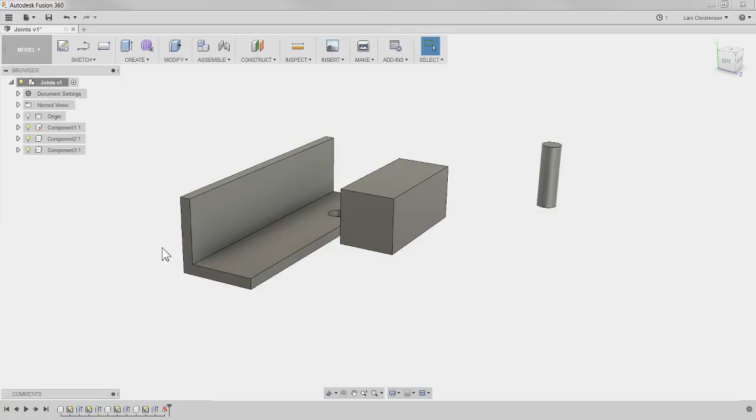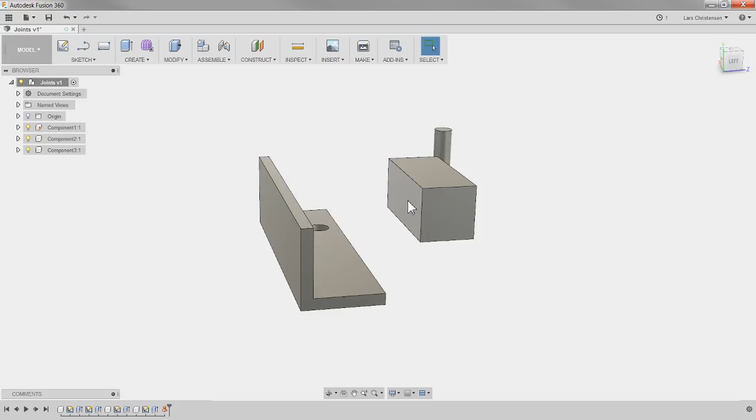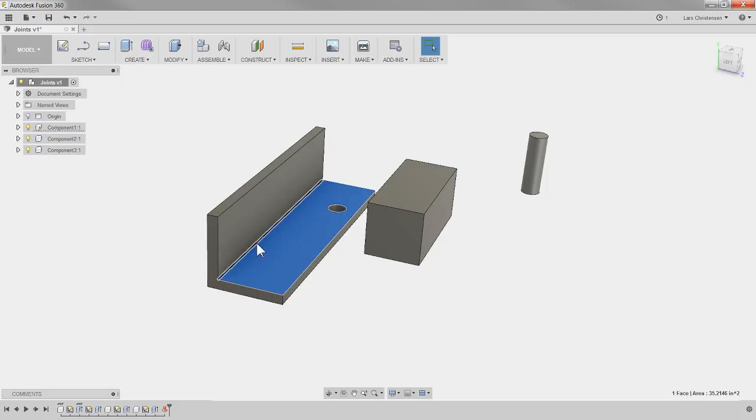If you're looking at this model, we're taking this block I have right here, and we wanted to mate or constrain it to this L channel right here. What you would do with standard CAD like Inventor or SolidWorks is mate this face to maybe this face, creating a linear or planar constraint between the two. Then you will go over and do maybe a mate between this surface and this surface, and you'll see how you now have a sliding action down this L channel. Then maybe finally with the third mate, you will do this face to this face. So that's how you would do it normally coming from another software like Inventor or SolidWorks.

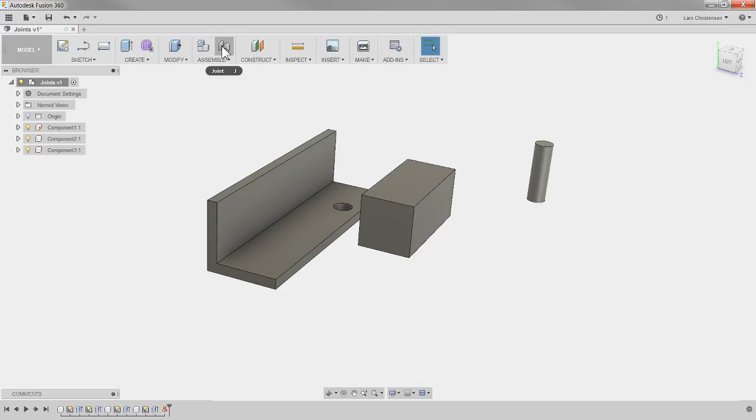Now I want to show you how you do it inside of Fusion, and then I'm going to talk a little bit more in detail about it. Check this out. So what I want to do is end up with this block laying in this L channel, planar to this face here. I'm going to do a joint. I'll go over to our component here, and you see how I get the little coin that shows up — that is actually a coordinate system, we'll talk about that in just one second. I'm going to snap to this corner and click once.

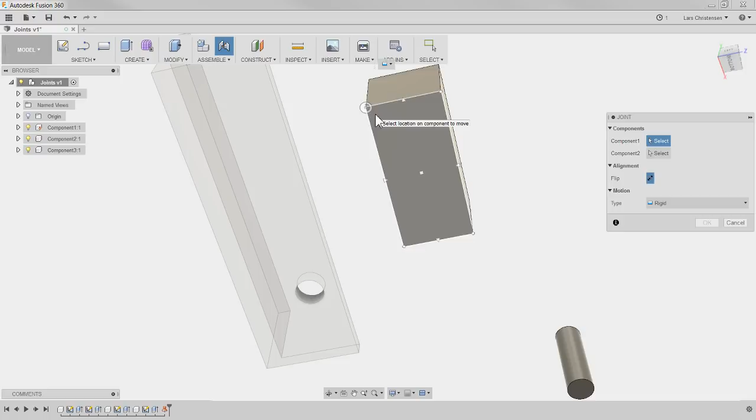That's component 1 selected. I'm going to go find the same corner over here and select that. Just with those 2 clicks, I've placed that component where I originally wanted, where with other software you would have used 3 mates to be able to place this. Now here's the trick that Bryce taught me.

With other software, you're kind of doing one face at a time to eliminate or take away the degrees of freedom. With Fusion, you start out by applying all the constraints, and now you can loosen it up. After I place this, I can hit the drop down and decide I want to do it as a slider, for example. Now it will start to slide, and I can control around what axes.

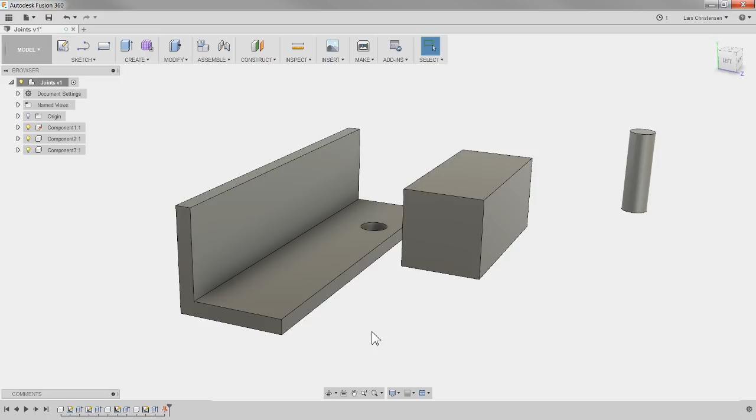So now I suddenly have that sliding motion that I want. I could also go in and do a revolute around one of these. Let me cancel out of it. Originally, instead of going in and saying mate this face to this face, then mate this face to this face, and then mate this face to this face, that's your normal Inventor or SolidWorks, where you're kind of taking 1 degree of freedom away.

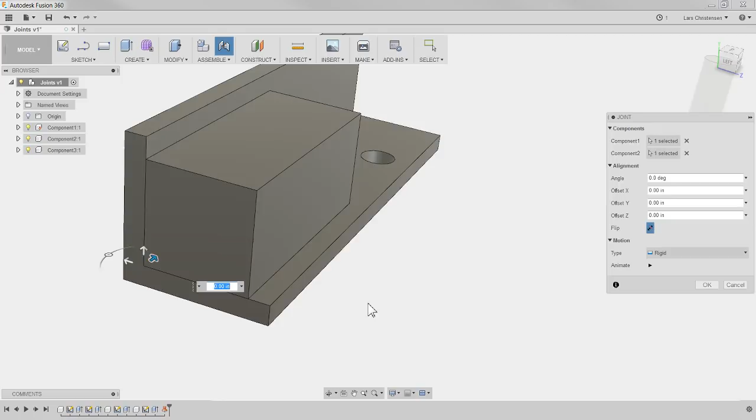The way you do it in Fusion is when you click here and hover over, you get this coin, and it has its own coordinate system. Literally, you snap it to one intersection, you snap it to another intersection, and boom, you got the same results as you will do with all the 3 other mates that you see inside of Inventor or, for example, SolidWorks.

Now you get some added ones right in here. So I just placed those 2 corners. I can go in here and now start offsetting. You'll see how I can grab the handles, or I can type in over here whatever you want. So that's kind of like an offset.

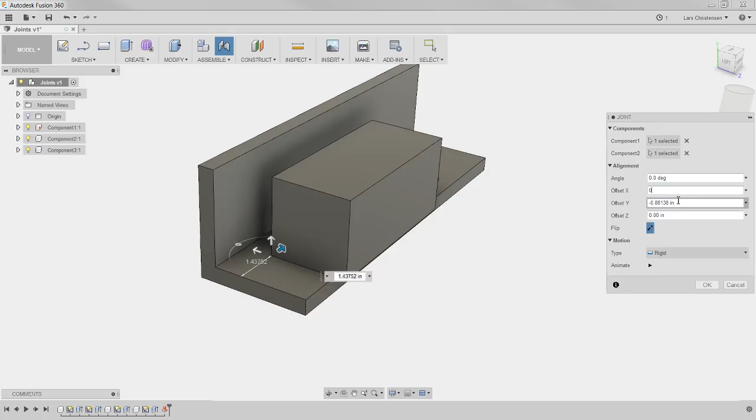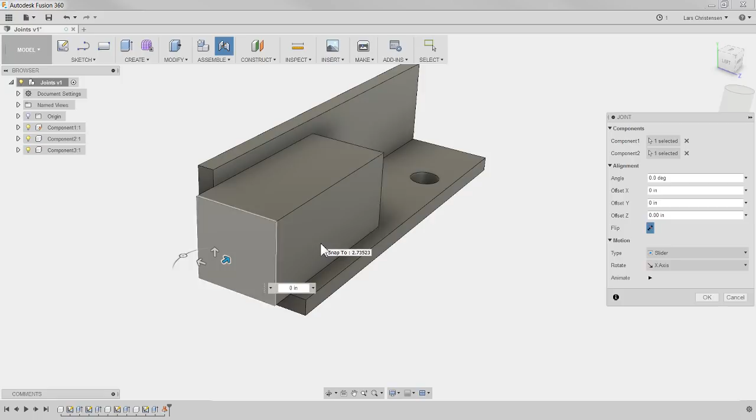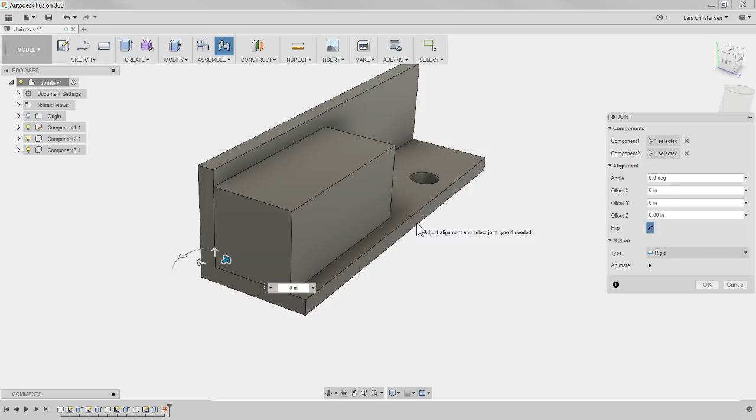I think this is probably, if you're coming from other software, the biggest thing you want to wrap your head around: with Fusion, you do 1 joint and that will make it rigid, and then you can start letting go of your different constraints. If you've really been struggling with this whole concept, that's the first piece you need to get. The reason it's rigid is because 90% of all mates, joints, or constraints you're putting on your models are really what you're going for is a rigid joint that can't move around. So that's why it's picking that first.

Now I wanted to come back to the coin that you see. When you hit the joint, you get that half moon coin, whatever it is. This has its own coordinate system in it, and that's what it's placing on the model. You'll see that when you hover over a face, you get some dots on that face that it will snap to. So you can either snap to the midpoint of this, or you can snap to the end point. You can snap to the corners of the blocks. It's kind of broken down like this.

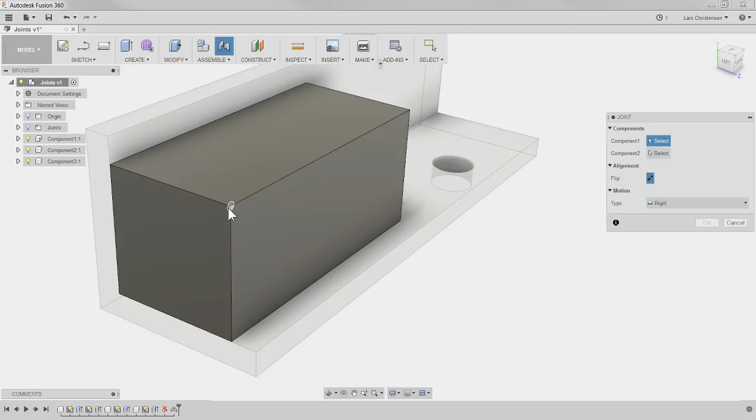Now, sometimes when you're trying to pick something, you'll see that it flips direction when you're trying to do that. Here's a trick: if you hover over the face and hold down Control, or the Command key on your Mac, Control on Windows, it will now stay to that face and not snap to any of the other faces. Let me go down on this face here. Right now, without holding anything down, it can flip whatever it wants. If I hold down Control on my Windows machine, you'll see it locks that down. So that's the trick when it comes to mating within Fusion 360: when you hit that joint, find the corner or point that you'd like to lock it down to.

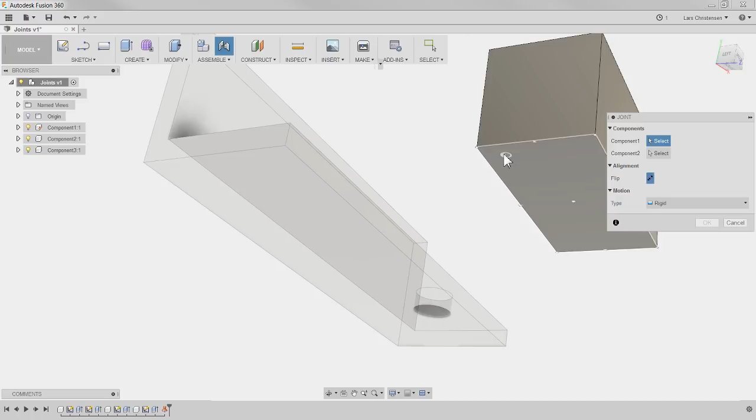So for example, this corner here, I want to click on that, I get a new coin lining up on the second component, and those two will now match up whenever I select down here and place that where I want it.

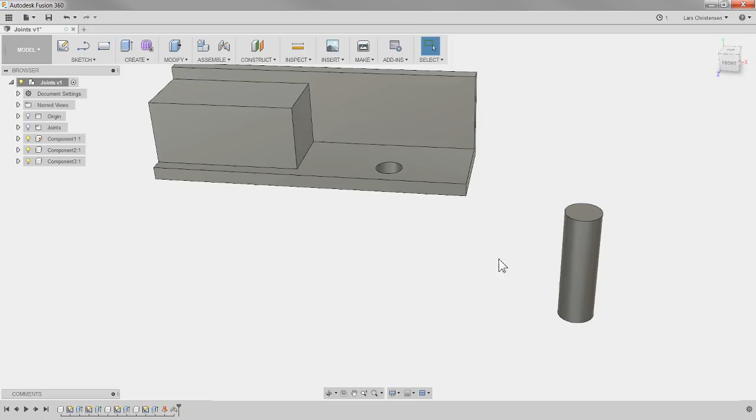Now I also wanted to show you that with a round cylinder type. So when I go in and hit a joint here and hover over a round, you will see that I actually get 3 places by default. There's top, it snaps to the middle, and it snaps to the bottom. So you get those 3 options right off the bat to snap into.

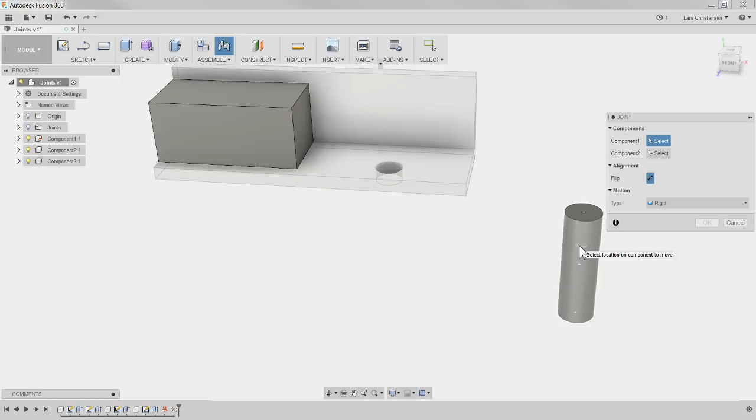So if I go down and select the bottom here and click once, and now I can go over to the round hole, and again, if I hover over the face here and hold down control, it will actually snap into the same one, the top, middle, or bottom.

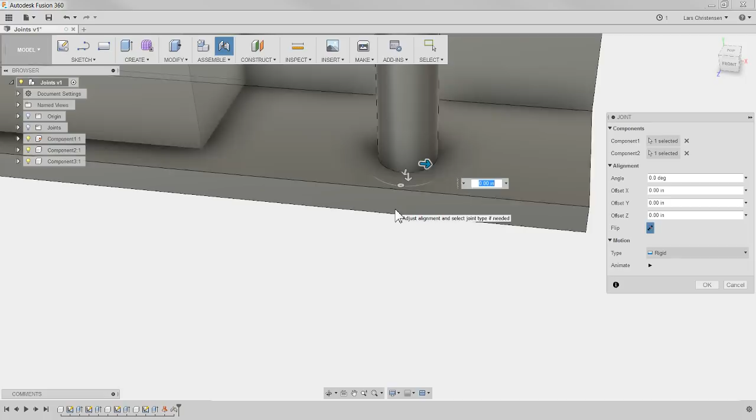So if I, for example, snap it to the middle here, you will see it's going to come over, and it automatically gives you a rigid joint, because it takes those 6 degrees of freedom and ties it all down at once. Versus the other software where you kind of got to do it one at a time. And now I can let go.

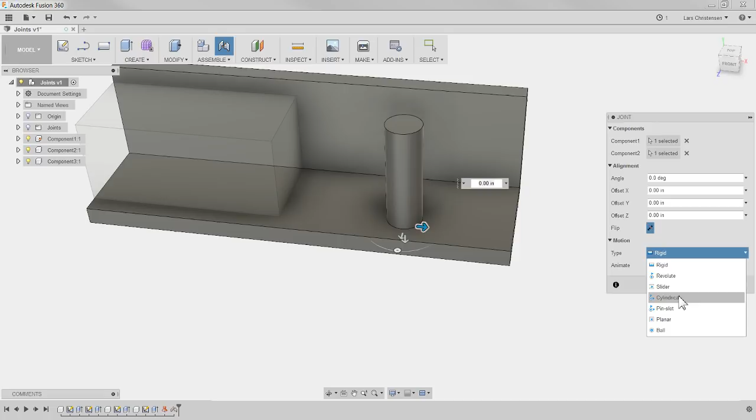So if I know that this is going to be cylindrical, I can go down here in the drop down and select that, and I now have that movement that you would expect. So that is the first thing that, hopefully, if you're coming from one of the other softwares, really was for me, but was like, wow, that was what I needed to know, how this works.

So instead of having to remove each degree of freedom one at a time, with Fusion the first one does it all for you, and then you let go of them.

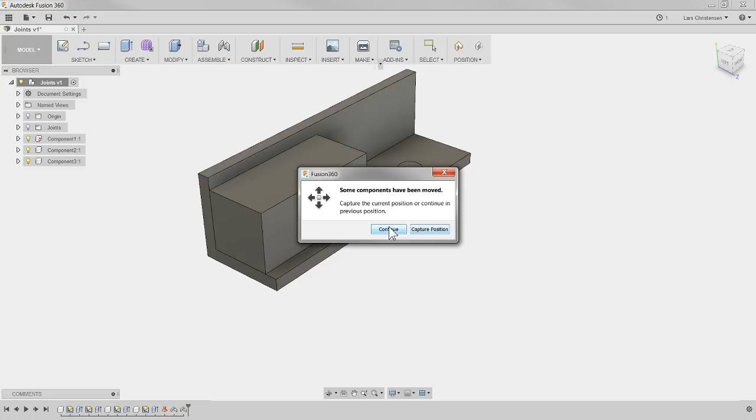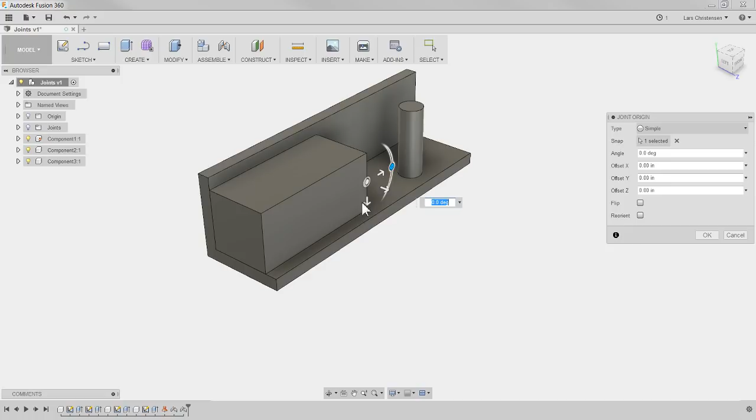Now, another thing you need to know is that these coins that hover around when you are in here—if you don't have the coin that you would like to get, let's say I kind of wanted this one a little bit over here—in the drop down you can create your own joint origin. So if I click on this, I can actually create my own origin in here, and now you will see that I can place it to this edge.

So if I know I wanted that 1.5 inches away from that face, I have just created my own origin that I can now, when I go into the joint, snap to.

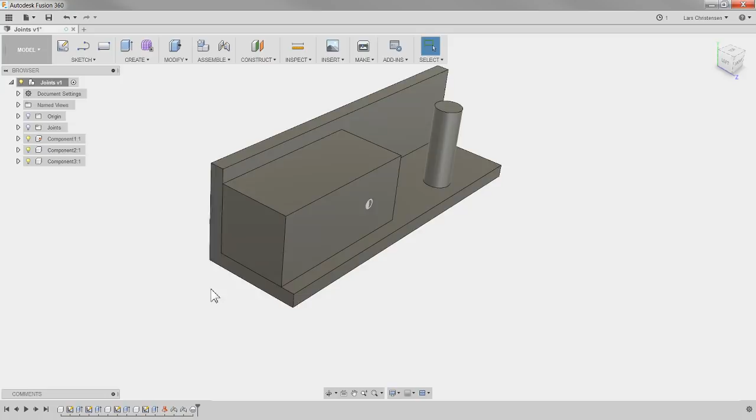But this does make you able to add joints a lot faster than in the old-fashioned way, where it's kind of like first this way, and then you got to do it to another face, and then the third face to put it in like that. That was reason number 1: joints eliminate freedom right out of the gate.

Number 2, joints are not the last thing that you have to do. So this is interesting: you can start adding joints a lot earlier to your design than, if you ever came from another software, you maybe ever thought of. And I'll give you a little bit of background about that.

Inventor, and I'm saying Inventor and SolidWorks just because those are the 2 products I know and used a lot—in Inventor and SolidWorks, you gotta go back to like the late 90s when those softwares were developed, early 2000s, and when they started out with a part file. That was all you were worrying about. You were going from 2D to 3D, right? And all you were kind of worrying about in the beginning was how can we create a cool 3D model. Well, then of course there was somebody who said, well, I need to be able to assemble them into one thing.

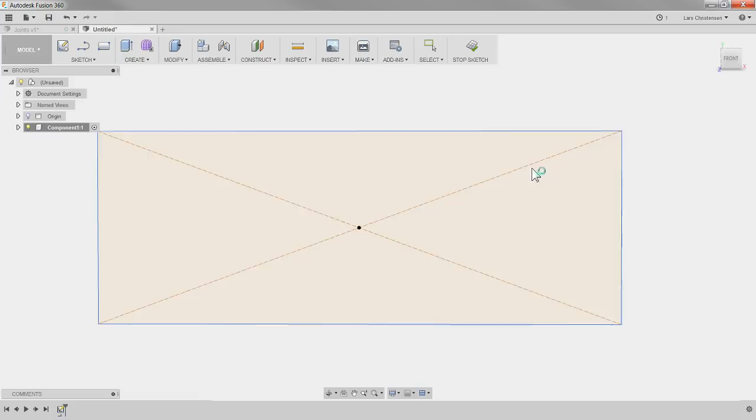I'm just going to hit the S key and draw something up here. This is not really important at all, I'm not even going to fully define it. I'm just going to create a block like this. So that is model number 1.

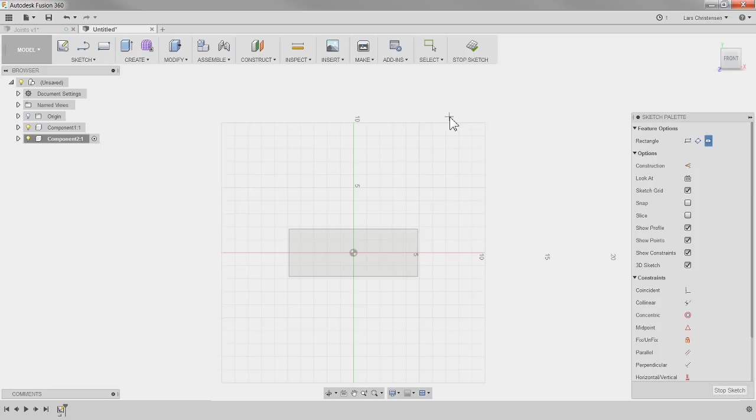And then I'm going to go in and create another component - new component, and that's going to be model number 2. We're going to do the same thing, just go in and create a block. It doesn't get much simpler. Let's make that a little smaller. It's not going to get much simpler than this.

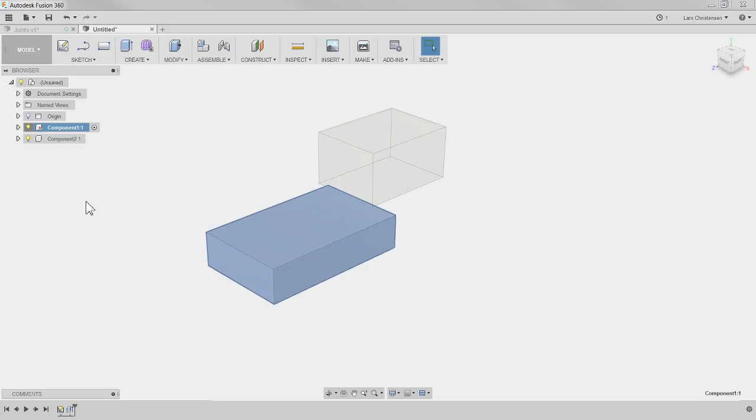So we got 2 components, right? Now, we normally want, inside an assembly, to ground one of them. So you hit ground, so one of them is kind of stuck. Now, if we go up to the main assembly up here, this one can move around, this one is stuck.

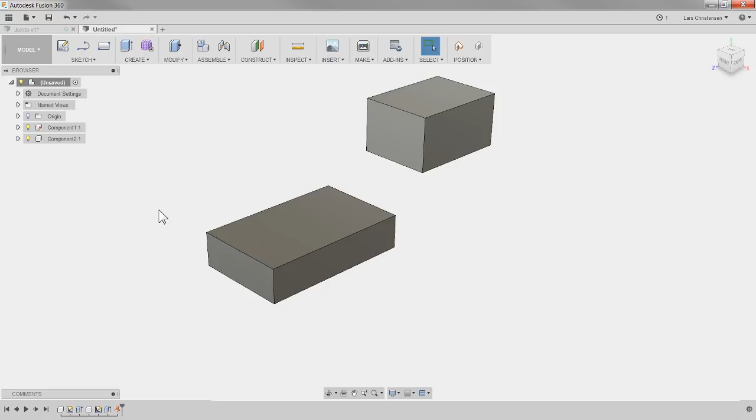You can actually also use joints for that, but that's another live stream. Here's something that some of you guys might want to hold on to the table for. So what I'm going to do now, I've got 2 components in here - I am going to add a joint to this face here, right on this edge, and apply a joint down here.

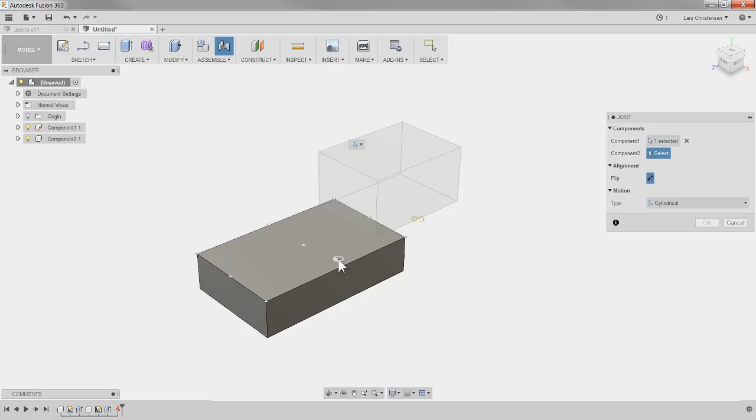Right now it remembers that it was cylindrical we used before. I'm just going to make it rigid, okay - nothing too crazy about this. We have these 2 parts now joined together. Anybody who has ever used Inventor or SolidWorks is all good with this. But check this out - what will happen now if I go in here and create a fillet on this edge? You tell me.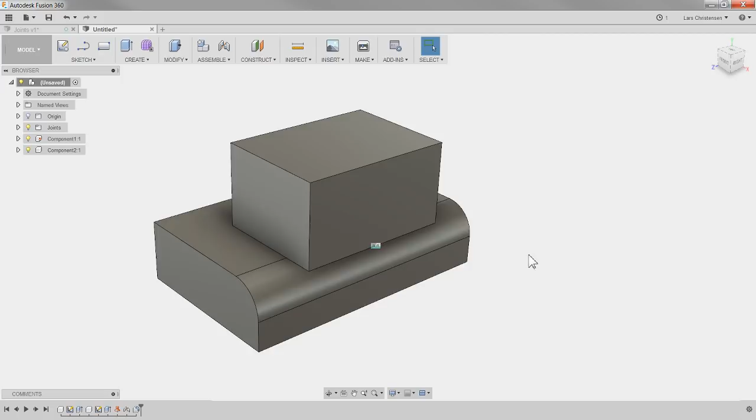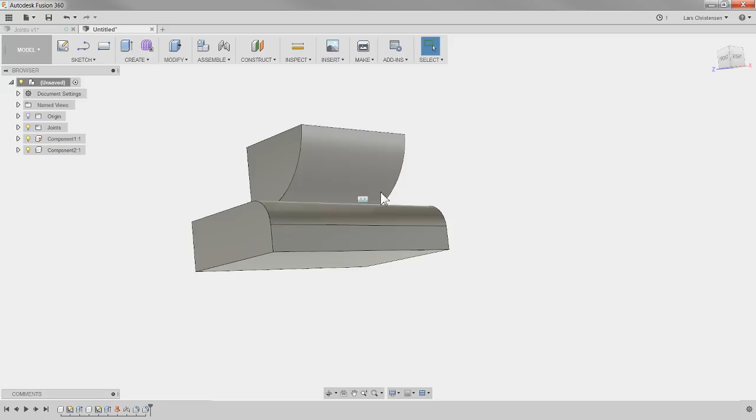Well, it appears like nothing is happening. Let me just repeat that fillet and select the other component too. Now, this part here is still joined. How can that be that I just blew up those 2 edges with the fillet on it, and this is still sitting in place?

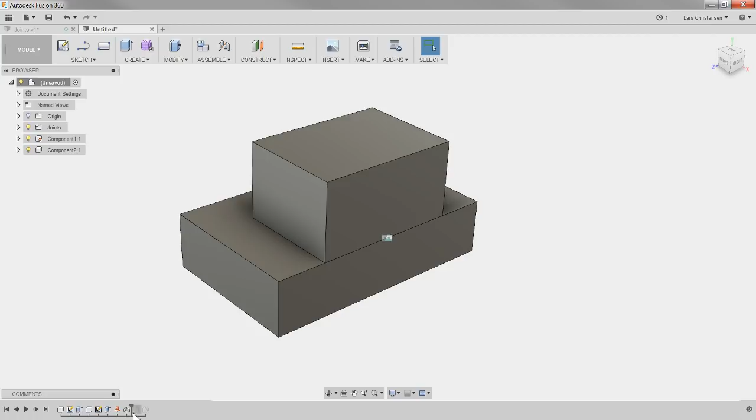Well, if you have ever used any of this software, you're asking yourself that - but this is one of the great things, one of the advantages with Fusion being a newer software and not from the late 90s, early 2000s. The reason is, as you would have guessed, that the joint is happening before the fillet in the timeline. Now, if you have never used any other CAD software, you're saying to yourself, well, that's what I expected to happen - it happens before the fillet, so of course it should be joined. That's the way it should be. But if you've ever used any other CAD software, you know that joints don't work like that.

That's not how they fit together. See, inside Fusion, a part file lives inside an assembly file, and an assembly file lives inside a part file - there is no part file over here that's got it wrapped into an assembly file. It's the same environment, and that means that the joints, the way the code is written, literally follow the timeline.

What this means is that you can start adding joints to components right off the bat. You don't have to worry about adding the details later on in your model. If you know two parts have to fit together as a slider, for example, you don't have to think about like a channel piece of aluminum that's got to fit within another sliding thing.

You don't have to model each component down to the detail and then add the joint. You can literally do it from the get-go and then start adding all your cuts and fillets and other stuff later on, and the model's not going to blow up because the joint is not sensitive like it is in other software. That's number two, so think about that next time you start modeling, that you can actually add that in there.

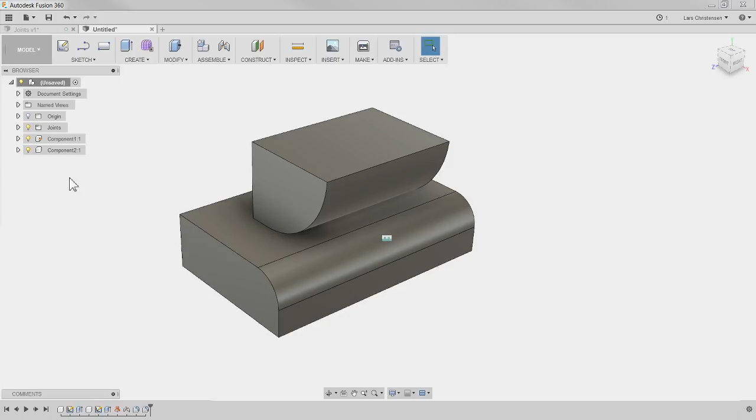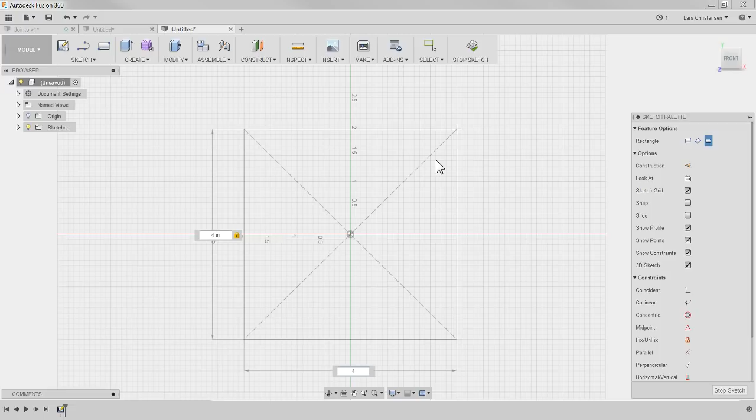So let's open up another design here. I'm actually not going to create the component first. I am going to just go in here and sketch a rectangle. Hit the S key, and I am going to do a rectangle. I'm going to make it 4 by 4, and I'm going to extrude this out. If I extrude this out right now, then what I have now is a body.

Bodies are great, they're very powerful, and you can definitely use these, especially if you're working on figuring things out. But of course, components are the ones that show up, first of all joints work with components, but it's also what's going to show up on your bill of materials for your drawings and things like that. I'm actually going to use this box to kind of control my whole assembly.

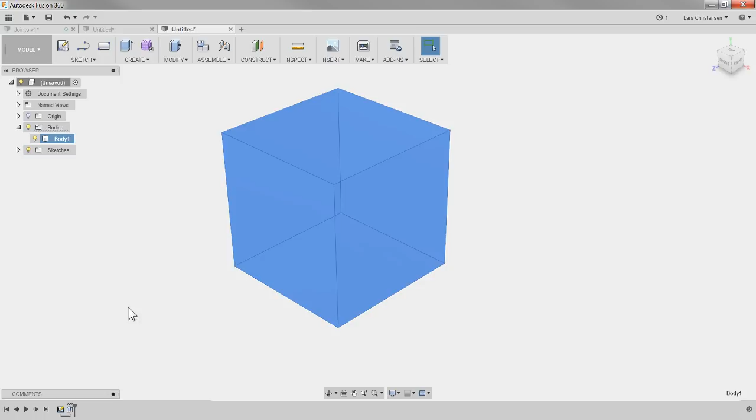So to make it a little bit easier so you don't have to fight this body all the time, I'm just going to right click on the body and change the opacity, making it somewhat see-through, because that's going to drive all my components. Now I'm going to right click and create a new component, so now I have a new component here.

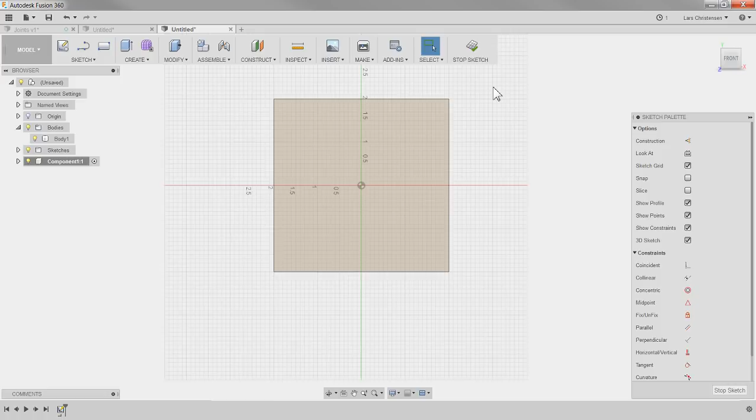We have our body, but now we have a new component. The face icon is turned on. I'm going to open up a sketch on that body, and I'm just going to do an offset of this edge here, an offset of minus half an inch, and create a couple of lines on this box.

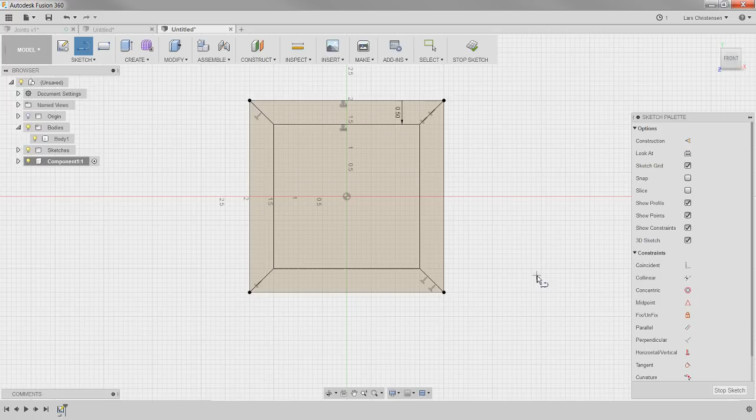Something like this here. Now I'm going to hit Q to extrude things out here, and if I press pull this one out, 300 thousandths. Now you will see over my extrude menu that it is doing it as a new body. I'm just going to hit OK to that, just to show you the difference. My sketch goes away, let's get back.

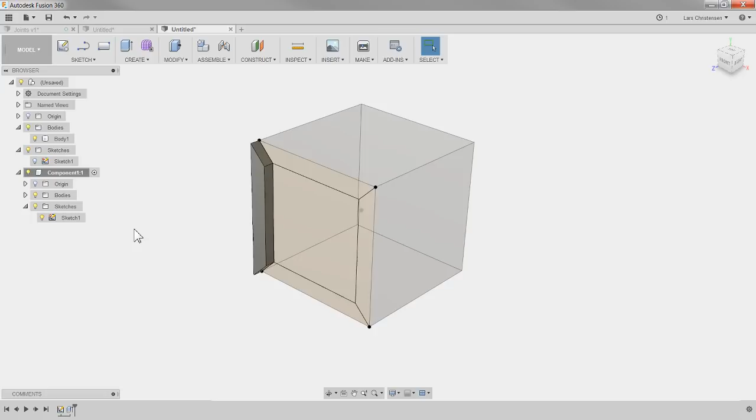Let's go into the sketch back on here. Now if I do the same thing again, extrude out, and do the same thing, 0.300. Be aware that from in here you can actually create components, so I'm going to create a new component from in here. I wanted to show you that you can create new components within, so right now these are becoming subcomponents to this component that lives inside this component.

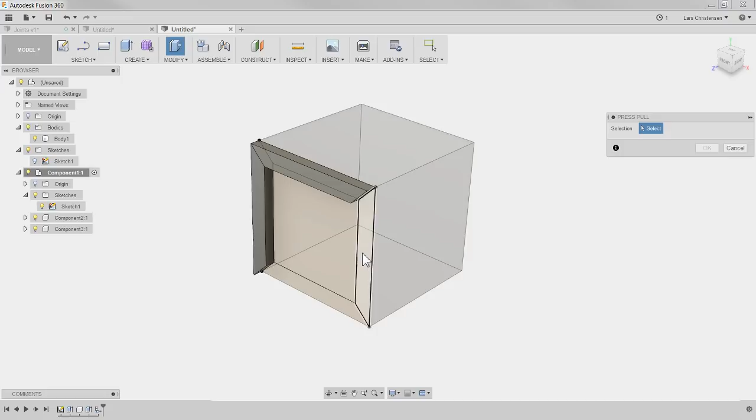Now you can always right click on a body and turn that into a component, so now I'll just turn the first body we created into a component. Be aware of how we can do that. Now I'm going to continue doing this two more times, so I'm going to hit Q and do the press pull, make it 300, and again make a new component. Hit OK, do that again, repeat press pull.

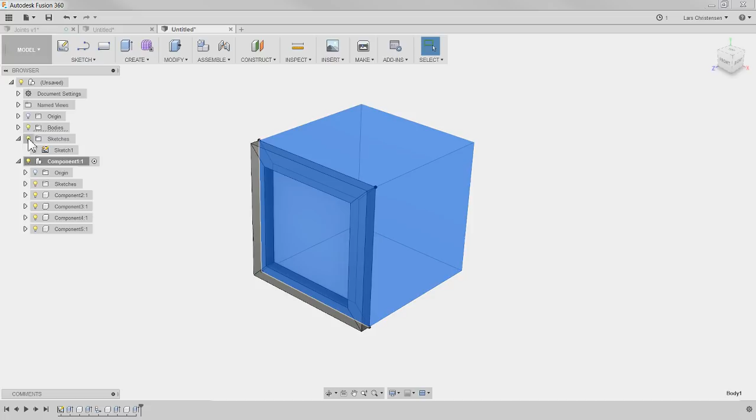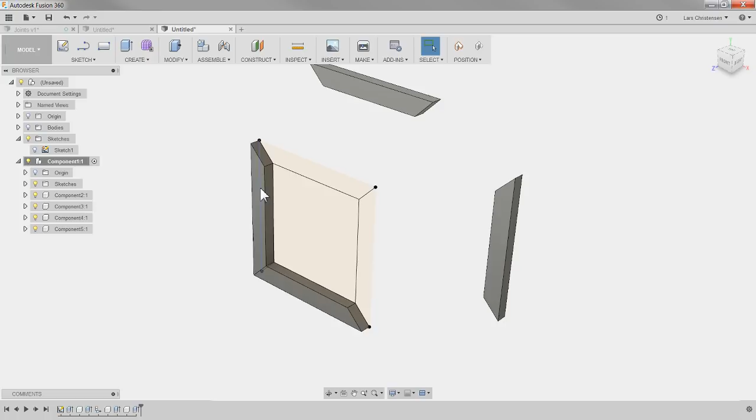So say I'm going to create a new component like that. Now I kind of have this body that is guiding everything. Let me turn that off for a second. And then I have these 4 components sitting right here. What I'm getting to is right now, these components can float around. Like I drew them up, but they are components, so they move around.

If you're coming from either Inventor or SolidWorks like I do, this is when you will start trying to join things, to make things together. So I showed you before how we can do the joints and how easy it is with the coins showing up. But there is actually also an option in here called As Built Joint.

It does what you think it would do, in that I don't have to move the parts around. I can just go in here, click on As Built Joint, select one component, select one other component, and you will see how it defaults to creating a rigid joint between these two components. Now I could change it to something else, but rigid is actually what I want here, so I'm just going to hit OK to that.

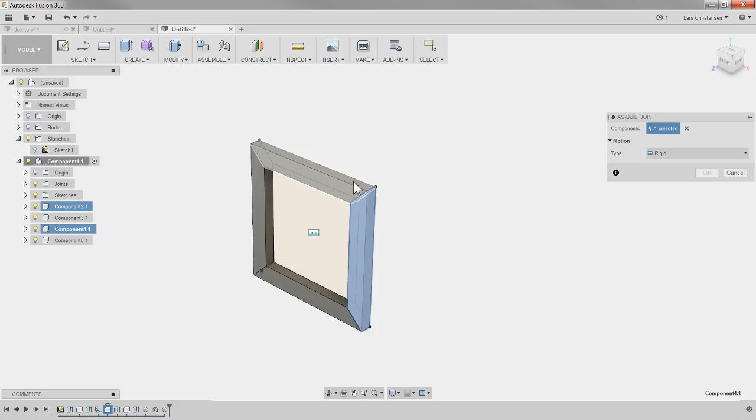I can continue that process. I can make this one here, this one here rigid. Right click, repeat, As Built Joint. I can go in and say this component and this component I want to be rigid. So I'm creating those joints with that as-built joint as you saw before. You had the standard joint sitting up here, same thing here. But this as-built joint is absolutely awesome if you draw things up like I did with this picture frame, where I want these components, and now it shows up and I have them all joined together.

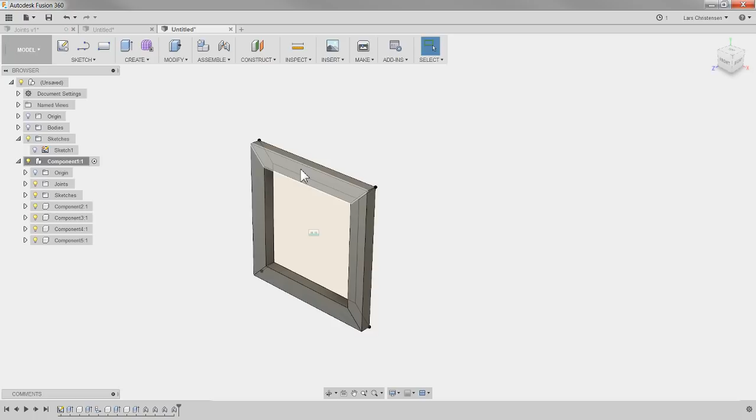The last thing you'll see here is that this thing still moves around, because even though I joined those components together, you can't actually see it unless I move this one over and turn the origin on. There's the origin for the original body we created.

You can actually also do As Built Joints between components right inside of the assembly here. So you can move things around like that. Okay, I hope that's clear - there's the joint with the little coin you're moving around.

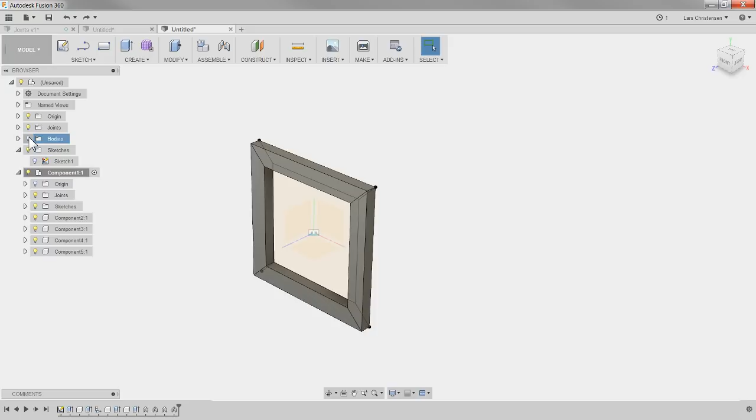Now I just showed you the As Built Joint. So if you model everything up, everything is kind of together, you have that in there. And now I want to show you another cool thing. Let me turn that body back on that we originated the whole thing from.

Now, if I go over to our sub-assembly here and hold down shift, select all these components down here, and do a Control-C, Control-V for a Windows command, you will see that now I'm just copying all those components that I had, from 4 to now 8. So you can do that - you've probably already seen that. So now I'll just create a copy like before.

But at this point, you will see that this one - I didn't take the joints with me. These are only the ones that are joined; these are still floating around. Now I could do the same thing as I did before, go in and repeat the As Built Joints. But there's another command you need to know about.

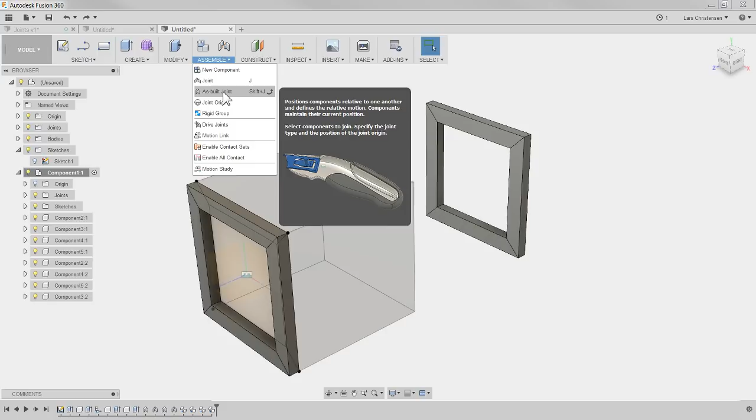That is called Rigid Group. So where the As Built Joint will create a joint between each component, where you can control if you want them rigid, sliding, or cylindrical, the Rigid Group is really just like we added some glue to all these components together, hit OK. So for things that are never going to have a real function like being able to slide around or interact, Rigid Group is another alternative that really just works as everything being glued together. And now I can do what I did before.

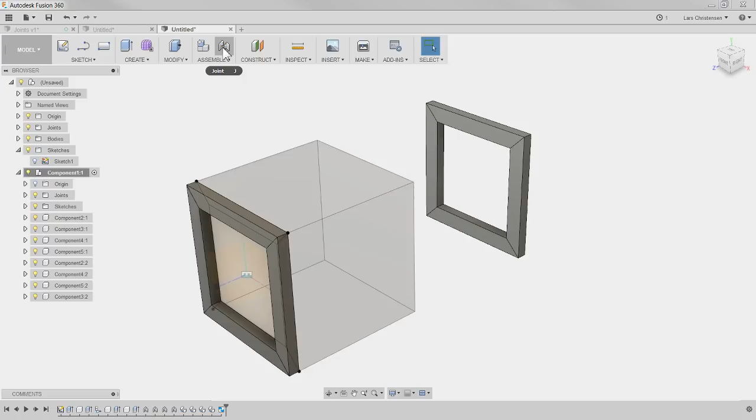I can either go in and hit a standard joint and place a joint coin up on this component, then go back over to our modeled box and bring that one over. Now I have 8 components. But what's neat about these 8 joints or 8 components is that they're all driven by that original sketch we created first.

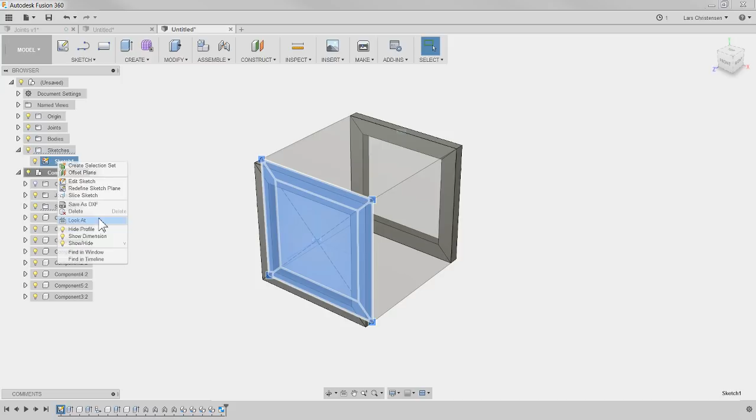So if I go into our original sketch, 4x4, and I change this one to 8, you see that everything is parametrically joined like this.

I'm hitting up on the half hour, only got one more thing to show you, it'll take 2 seconds. I hope this is useful because what this gives you the option to do is create a body with one rectangular sketch, but created the window frames around it, and everything is still tied backwards to that original sketch. So these joints don't have to happen all at the end. They can be in the beginning, they can be anywhere, and you can still do that.

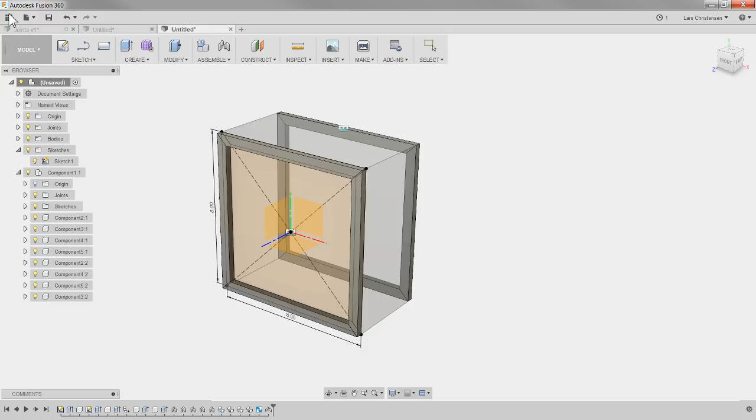Now the last thing I want to show you - let me save this assembly, open up our panel here, and make that sub-assembly active for a second. Remember that box we've been working with the last few days? Let me right-click and insert that into the current design.

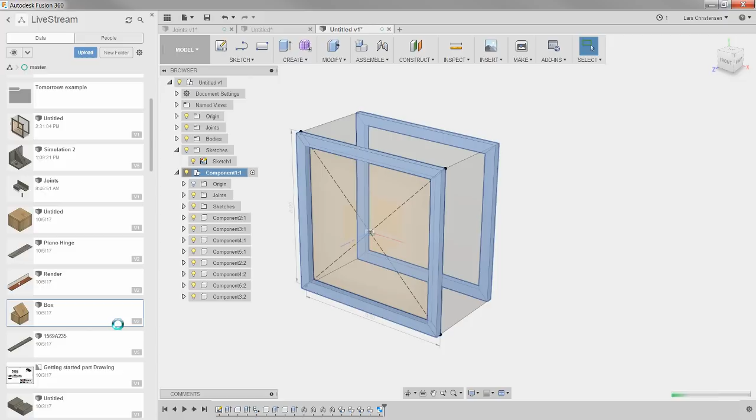So that's going to come in - I'm saving and bringing that in. It's a little bit out of proportion, that's fine. I'm going to place it in here and make things a little smaller. So we have our original assembly up here, then I created a sub-assembly, and inside that sub-assembly we have all these components that make that picture frame, and we also have this linked-in box that I just brought in.

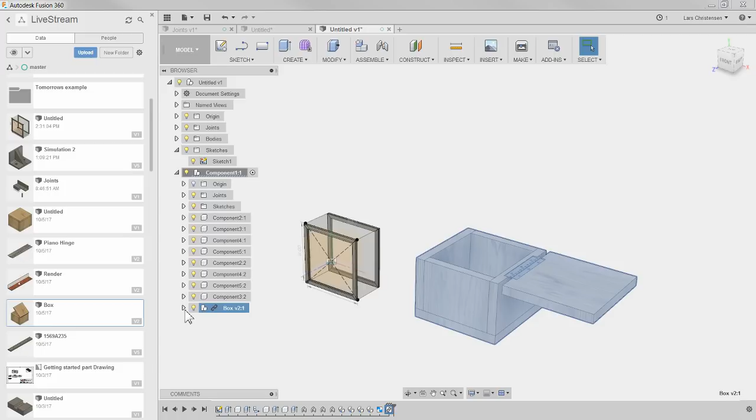Now, one thing I'm going to do to this box - it's still linked - I'm going to go down to the bottom, like we did when we made this box before, right-click and ground this, so it's kind of sitting inside of this.

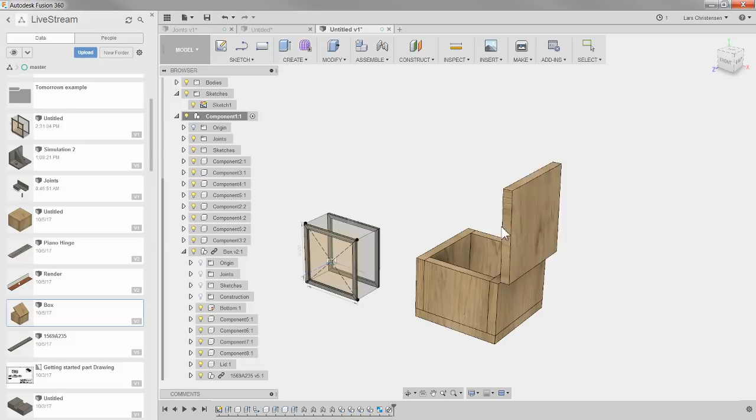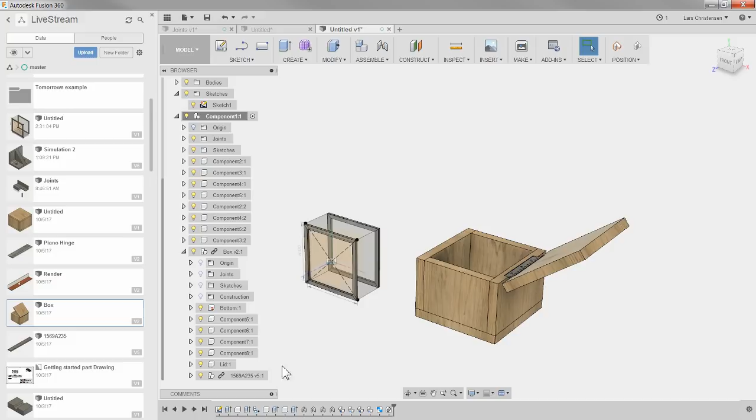Now if you've ever used Inventor or SolidWorks, check this out. If I grab this lid, see what happens? Normally when you bring a sub-assembly inside of another sub-assembly within an assembly buried down in the tree like we have here, it comes in all rigid, right? Because how can this file solve a joint that exists in a completely other file? Normally it takes extra steps to make them be able to do this.

By default, Fusion can do this. This is one of the advantages of having newer development that can rethink how we work with software. So I hope this was useful.

And in the end, I hope this gave you a little bit of insight on how you can work with this - one dimension, or the dimensions on the box, suddenly controlling that whole picture frame moving around.